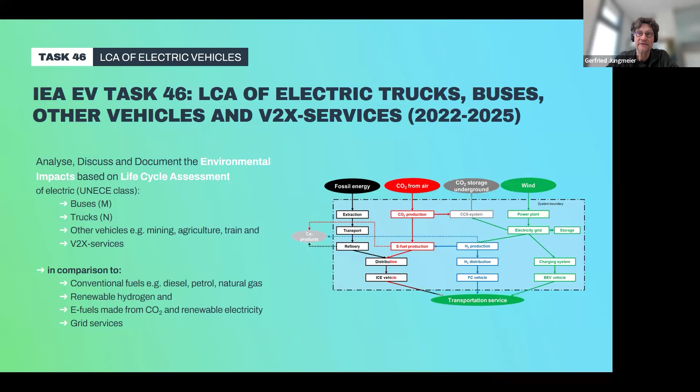Our view on these different systems is always based on life cycle assessment, where on one hand you have the transportation service we all need for our mobility needs, and on the other hand of the system boundary, our life cycle assessment always starts in nature by taking raw materials or energy from nature, which is then technically transformed via different process steps to the transportation service.

So far, we have an impressive list of 12 participants from different countries. I will not mention them all in detail, but at least we have 12 participating countries. We have also established a collaboration with another technology collaboration program on alternative motor fuels, because in the area of e-fuels, that was a very good synergy using also expertise from another collaboration program. And then we have 2 observers, so in total we are 14 participants contributing to this activity.

Coming back to the technology collaboration program, in total we are running several different tasks in many different areas. It's about electric freight vehicles, technology in that area, marine applications, electricity use in harbors and ships, but also critical raw materials needed for electrification of different transportation modes. We also deal with use phase, battery swapping, and economic modeling and systems that make electric systems economically useful.

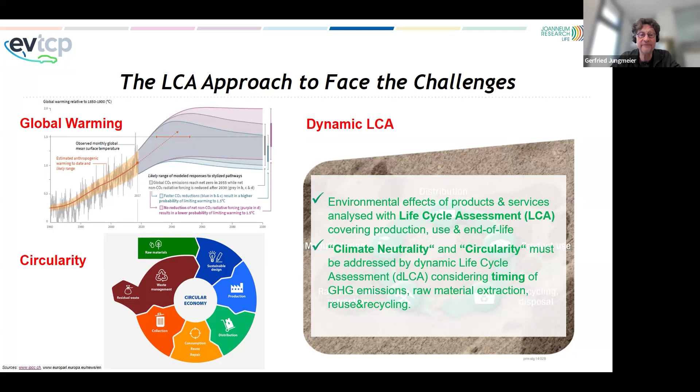To address climate neutrality and circularity, you have to apply a so-called dynamic life cycle assessment, a further development of LCA, because it's very important to consider the timing of greenhouse gas emissions, the timing of raw material extraction and use, and when reuse or recycling started over the overall life phase and lifetime of the vehicle.

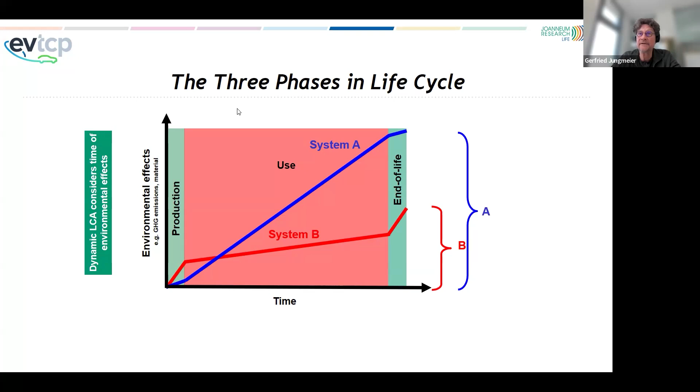Let me give an example. Looking at a vehicle's life cycle, you have the production phase, the use phase, and the end-of-life phase, with time running on the x-axis, while different environmental effects like greenhouse gases or materials are on the y-axis. Here you see two different systems with different accumulated emissions across production, use, and end-of-life phases. In LCA, if both systems provide the same service, at the end of the vehicle's lifetime, if system B is lower than A, you can clearly say that vehicle B has lower environmental impacts.

And there could also be a system C looking like this, maybe a higher emission on the very beginning, but during the operation phase, this line flattens, so you can still provide transportation service while not adding very much additional environmental burdens to the overall service. And in the end of life phase, of course, maybe we can also decrease the environmental effects. Yeah? And this is at least the system we are most interested.

One example is if you have an electric vehicle, if you buy it today and plug it in the Austrian electricity mix, you roughly get 75% renewable energy. But during the lifetime of this electric vehicle, the electricity generation system in Austria will change, because we have a national goal that in 2030 only renewable electricity will be available in our electricity grid. And that means as you get a different electricity during the lifetime of operating the electric vehicle, you at least have a development where you say you still can provide transportation service, but no additional greenhouse gas emissions.

And this we call towards climate neutrality, this flattening of the curve. And the second important thing of this system C is this decreasing effect in the end of life phase. This means if you're really able to recover some or even more, or even most of the material you put in the system, if you can recover this material and reuse it for any other further product, of course, this is also going in the right direction because it's towards circularity.

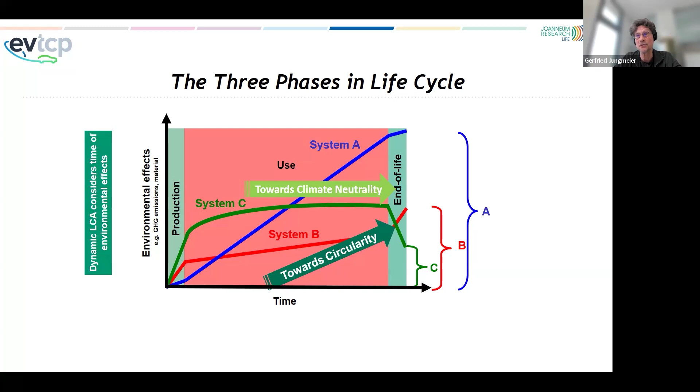So this is at least the system we are most interested in, to find systems that go towards climate neutrality and towards circularity. Finally, everybody's talking about climate neutral transportation system.

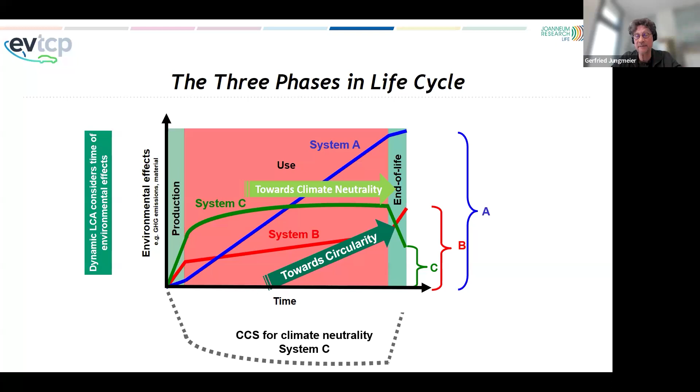And so far in our discussion, we say a climate neutral system is only possible if you combine it with a carbon capture and storage system using renewable electricity to capture CO2 from the atmosphere. At the same time, for example, here in the graph, the green system is emitting greenhouse gases. If at the same time, the carbon capture and storage absorbs this carbon or CO2 and stores it forever underground, this might be a principal system that is really climate neutral.

because you have no greenhouse gases in the overall lifetime. So when we talk about climate neutrality and circularity, of course, the most important thing is on the very beginning to define what is climate neutrality and what is circularity. And this definition you see here is really dedicated to be applied within life cycle assessment. And we say a system is climate neutral and circular if in the whole life cycle covering production, operation, and end of life phase, if you only use reuse components or secondary recycled material, and you only use renewable energy.

And while doing so, you also make no waste and no greenhouse gases. Yeah, so if you fulfill these requirements, no primary material, no waste, and no fossil energy, at least then you say this is really the ideal climate and circular transportation system, or which is valid, at least I think also for other products and services.

And using this definition, we have developed two indicators. We have an indicator measuring the circularity potential, which is the material circularity index, between 0 and 100, or between 0 and 1, where 0 means a linear system, where everything becomes waste, where in a circular system, everything is really in a closed cycle.

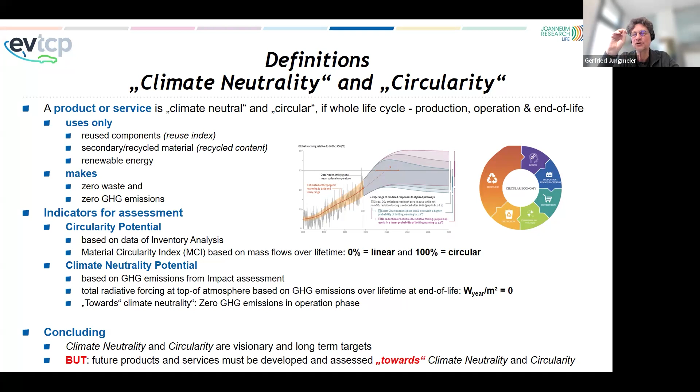And we really have to see if our products and services we are now developing, that at least they show that they have the potential to become climate neutral and circular, and at least that they go in the right direction, which means towards climate neutrality and towards circularity.

Why is it so important? When you have the greenhouse gas emissions, you see here in the graph that the greenhouse gas emission is something different than the climate neutrality potential.

So in a normal LCA, you would say all the systems have at least the same service and the same greenhouse gas emissions, so there is no difference. Therefore, it's important to really have the timing of these emissions over the lifetime, and secondly, to count the radiative forcing potential at the end of life of the overall system, because there you see how much these greenhouse gas emissions are heating up the planet.

We all know that if you emit greenhouse gases today, a part of these emissions is decreasing and disappearing, mainly in the ocean, over time. And the later you emit, the later this process starts. So this climate neutrality potential is a way to really measure and judge the timing of the greenhouse gas

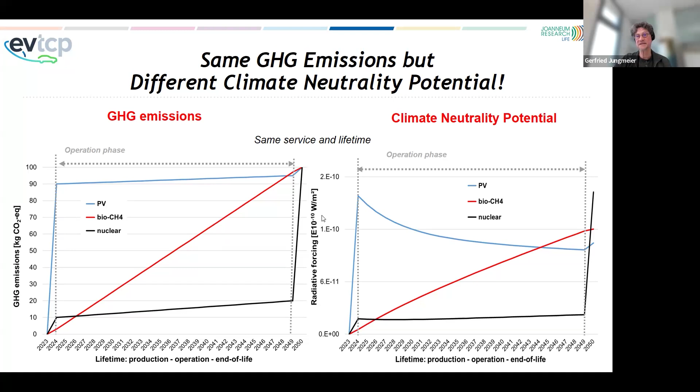And the second important thing is this circularity potential, where we used as a starting point the material circularity index, developed by the Ellen MacArthur Foundation, which includes a material factor and a utilization factor. And you can calculate this factor. The more you use renewable energy, the more you recycle, and the more you reuse materials, the higher this circularity factor is.

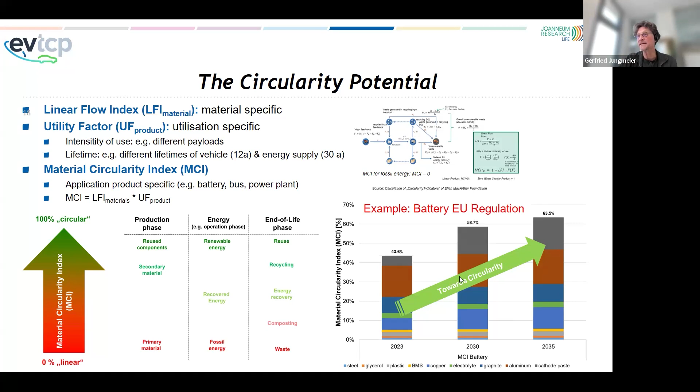We did a small application looking at the EU battery regulation, where they have binding targets for using recycled material and certain recycling efficiencies and collection rates. You see here the current material circularity of a battery today, in 2030, and in 2035. If these rules from the EU battery regulation are applied, the circularity really increases from roughly 40% to over 60% in the future.

And so in our case study, we analyzed many different trucks. We looked at small trucks, medium trucks, and big trucks. Today I will only focus on the small trucks, but if you're more interested, you can ask me. We have already published this paper at a conference, so the whole work is available.

Most relevant in this analysis, beside the different trucks, is that we use only renewable electricity, because only with renewable electricity do all these systems really gain the highest environmental benefits. Additionally, we say we need to build new electricity generation plants, so building the new electricity generation plant is part of this LCA. We're not only building the truck, we also have to build at the same time the facilities for additional renewable electricity, but also, in comparison, the facilities needed for hydrogen production and for e-fuel production.

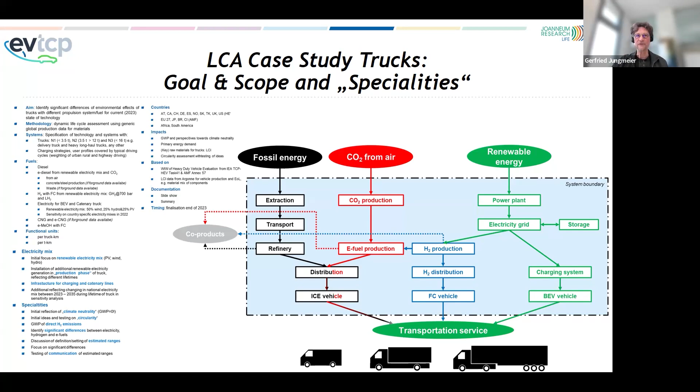Additionally, we have a big question in our LCA case study. There are so many environmental impact categories on a global, local, and regional level in conventional LCAs, but none of them really covers the climate neutrality potential and the circularity potential. So for us, it's very important to see if these are really new impact categories not covered by any of the already existing categories.

Here you see a final result, as most of you may have seen already before. You see the greenhouse gases and the primary energy demand for the different systems we compared: diesel, e-diesel, electricity, and hydrogen. You need as a minimum the primary energy and the greenhouse gas emissions, because you see the results on the energy side are quite different from the greenhouse gas emission side.

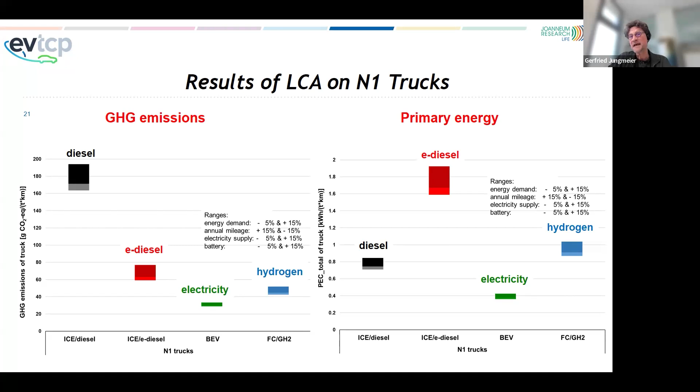So this is at least a conventional result. We are all used to it, but here you do not see or are not able to calculate the climate neutrality potential. Nevertheless, you still see which of these systems has the lowest greenhouse gas emission and which system has the highest energy efficiency.

So in our assessment in this dynamic LCA, we get at least the same results. You see how the emissions are accumulating over the lifetime. For example, the systems using renewable electricity, like hydrogen, e-diesel, and electricity, have more or less a flat line during the operation phase because they use renewable electricity, and this guides you towards climate neutrality. On the other hand, the diesel system has a steady increase in greenhouse gas emission due to the use of diesel.

But it's also very important to see that in the construction phase, at the very beginning, when you build the truck and especially all the infrastructure and the electricity generation, these systems have significantly higher greenhouse gas emissions than the diesel system.

But over time, these systems really have the potential to become climate neutral, to go in the right direction, which you can also see in the climate neutrality potential on the right-hand side, where you can compare the radiative forcing potential.

The decrease in the end-of-life phase is mainly due to the longer lifetime of the electricity generation system, which lasts at least 20-25 years, where the truck only lasts 10 or 12 years. So at the very end, the electricity system and the infrastructure can be reused for any other purpose. That's why in the LCA you have to allocate these positive effects to the considered system, and that's why in the end-of-life phase these effects are decreasing, giving you the final value at the end of life.

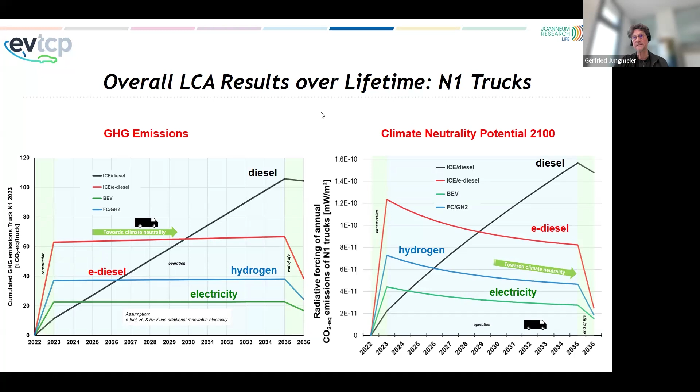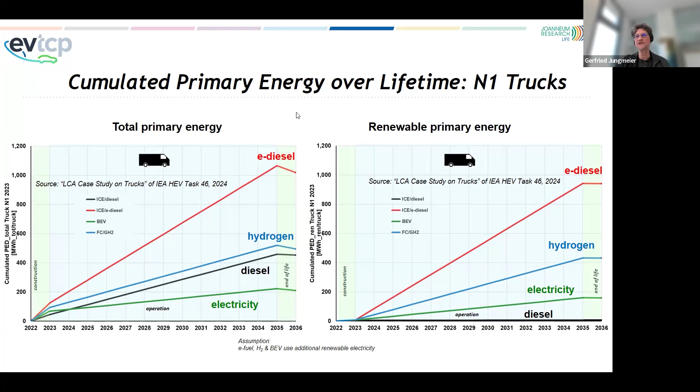You can do the same analysis if you look at the primary energy in total, on the left-hand side. More interesting is the share between renewable energy and fossil energy. You see here that the e-diesel system needs much more electricity to drive a kilometer compared to hydrogen, and you need significantly less energy when you drive with electricity directly. So using renewable electricity for truck service is much more efficient - you need much less energy for the same ton-kilometer in our consideration compared to hydrogen and compared to e-diesel.

Last but not least, I'll show you some results of our circularity potential, where we looked first at the different components, starting with the trucks. If you look only at the trucks, on the left-hand side, you see that the diesel truck has a higher circularity potential than the battery electric truck or the hydrogen truck. This is because of the fuel cell and the hydrogen tank, and because the battery has a lower circularity than, for example, the diesel engine and diesel tank.

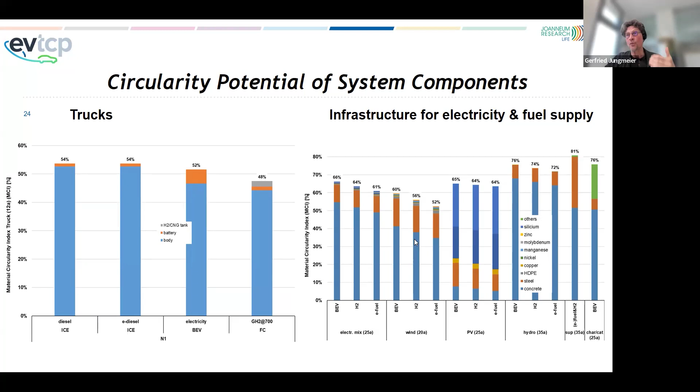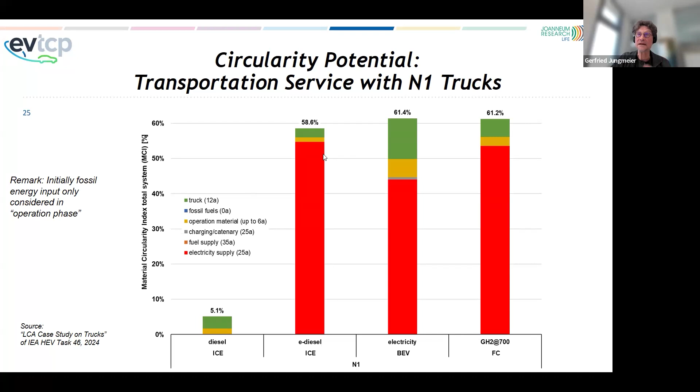On the other hand, on the right-hand side, you see the same analysis for the electricity supply, and also for the supply and production of hydrogen, e-fuel and diesel, which also have different circularity potentials. In the overall system, if you combine the circularity of all the components needed in the life cycle to provide a transportation service, based on the mass balance over time, you see that diesel has the lowest circularity potential due to the use of fossil diesel - so much of the mass used is diesel, which is not circular. That's why diesel has such low circularity, whereas the other systems using renewable electricity have a similar circularity, in the range of 60%.

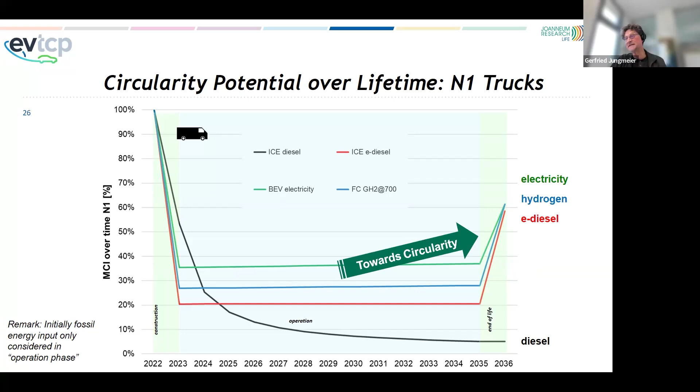And on the very end, due to the reuse of mainly the electricity system, but also the charging system and the hydrogen production system and so on, you get an increase on the end of life phase, because you are able to reuse main parts of the system for any other system after 2036. So this means this system is going towards circularity, but with 60%, it's still far away from being really 100% circular.

The overall result just summarizes what you have seen so far, and this also shows you that the electricity battery electric system in all of the components has the best environmental performance, and the diesel has the worst performance, except for the primary energy total demand, which is higher for the e-diesel and the hydrogen.

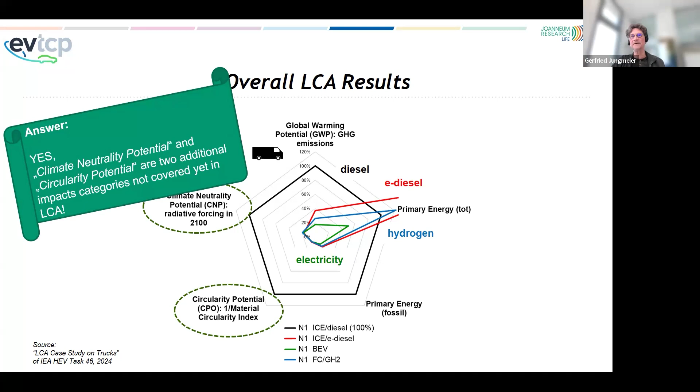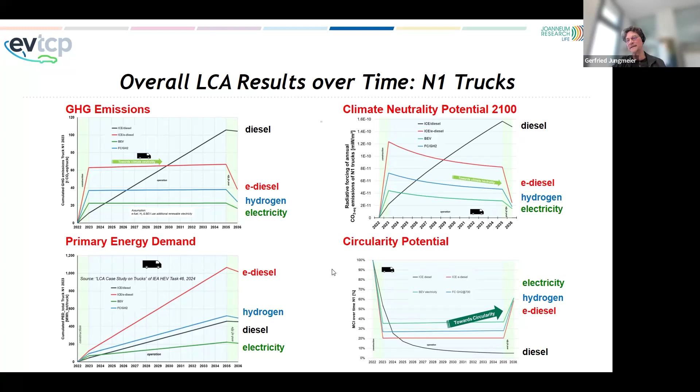And yes, we can answer the question at the very end. We think that climate neutrality potential and circularity potential are really two additional impact categories not yet covered in life cycle assessment. And that's what we wish for the future, that we really all apply a dynamic life cycle assessment by really timing greenhouse gas emissions, material extraction, material reuse over time, so that we're really able to judge the overall system and identify which systems in the very end have the highest environmental benefits.

I would not repeat my conclusions again. I've done that at the very beginning, but this was at least my best explanation now to explain to you how we come to these conclusions in the detailed analysis. And after the next presentations, I'm looking forward to getting some questions in the chat.

Thanks, Gerfried. Yeah, thanks for having me. I'm Robin Smit, Director at TER and an adjunct professor at the University of Technology, Sydney in Australia.

Next slide, please, Gerfried. So basically the previous presenters already talked a lot about it, but very quickly, LCA is a very powerful tool, as I'm sure everybody is aware now. It's basically a systematic evaluation of all the aspects of a vehicle's life and its associated impacts, and those impacts can vary to a great extent, and there's different ways of looking at an environmental impact, as Gerfried already discussed.

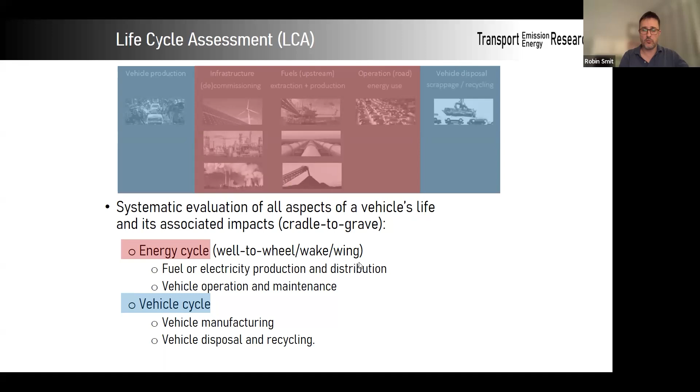But I like to split it into the energy cycle and the vehicle cycle. The energy cycle is also referred to as the well-to-wheel analysis, which I will talk a bit more about in this presentation, which includes the fuel, electricity production and distribution, and also importantly the on-road driving and maintenance. The vehicle cycle is basically anything related to the production and the disposal of the vehicle.

I think it's important in any LCA to consider four important elements to ensure that we get reliable and robust results. This is from our own experience. First of all, it needs to be country specific as much as possible. There's a range of key factors that can vary substantially between countries and even regions, and they need to be considered wherever possible. Also, they need to be mode specific, and I will talk a bit more about that in this presentation. So when I talk about different transport modes, I'm not only looking at road transport, but also rail, air, and sea transport, and they all require different methods in terms of their impact estimation.

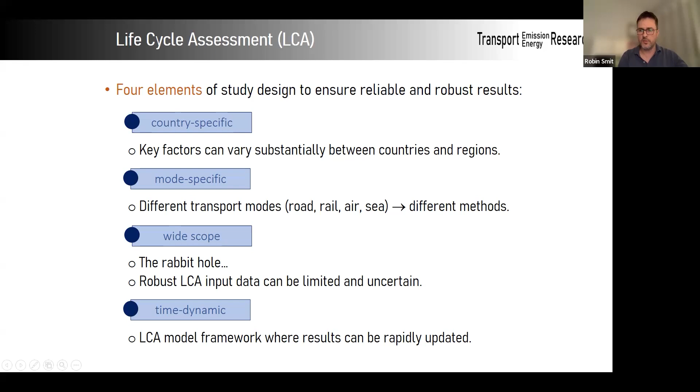By definition, LCA has a wide scope and has the risk of disappearing into a rabbit hole, because you can go to the nth degree in quantifying and analyzing different aspects. So that's one of the main challenges of LCA. And on top of that, robust LCA input data can be limited and uncertain and needs to be dealt with as well. And the last point is time dynamic—not the same as the dynamic that Gerfried talked about. What I mean here is that things are changing very rapidly in the transport space and the renewable energy space, so things can become quite quickly outdated. So you really need a system that can quickly update the LCA results.

Next slide, please. So I'm just going to quickly talk about two studies that we did, one for passenger vehicles and one for trucks. They're all open access papers, so if you're interested in the details, they can be accessed. I just want to point out at the front that our focus is really on the greenhouse gas emissions, and as Gerfried pointed out, that is just one of the aspects that you can look at in LCA. But in the transport sector, at least, it's possibly the main driver of the changes that we're undergoing at the moment, so greenhouse gas emissions by itself are really important. Our focus for the functional unit is grams per kilometer for passenger and freight, but also grams per ton kilometer for freight transport.

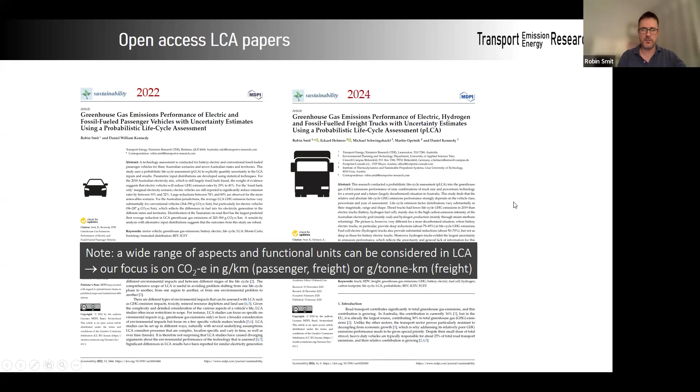So getting back to the modeling approach that we typically use. The first step is to include all the key variables in a mathematical formulation of the LCA model. The second important point, referring back to the previous elements I talked about, is to...

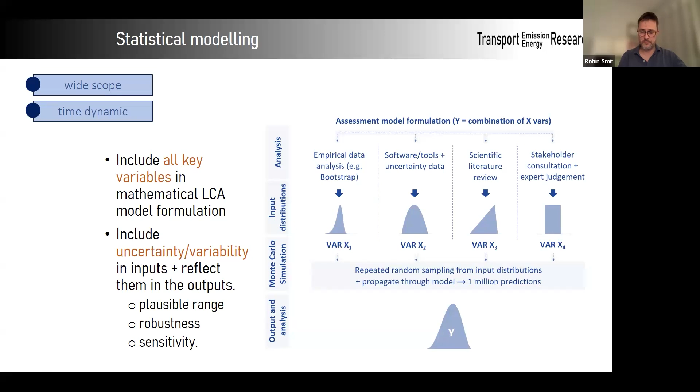Just a few examples of key variables that we normally include in LCA models. For example, lifetime mileage and service hours are linked, but they are obviously very important if the functional unit is kilometers or ton kilometers. The emission intensities of the different types of fuels and energy is quite relevant. Vehicle specifications are of course quite relevant as well, and need to be used to achieve a good classification of the transport units you're looking at.

In particular, the variability in battery, the fuel cell, and the tare mass of vehicles is quite relevant for LCAs in our experience. The durability of batteries and fuel cell systems is a critical factor, and we explicitly model that with a system replacement factor. There's a lot to be said about that particular aspect of the LCA, and it's also very time dynamic.

The payload of the vehicle, and the various losses in the systems like battery charging, leakage of hydrogen, grid losses, etc., need to be accounted for. An important one is real world fuel and electricity consumption per kilometer. And of course, this real world energy use is a function of other variables like the tare mass of the vehicle, the year of assessment, etc.

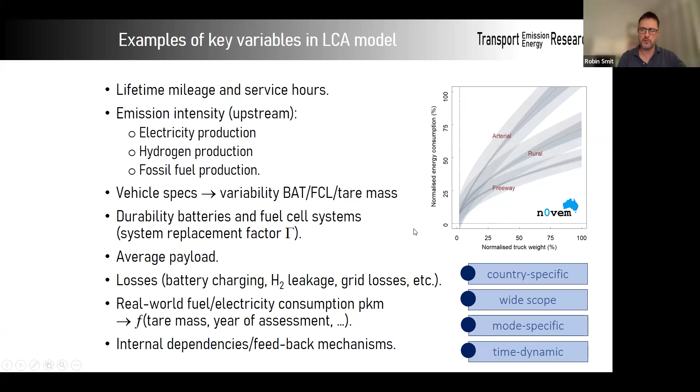That brings me to the last point, which is the internal dependencies and feedback mechanisms that need to be explicitly modeled. On the chart at the top, you can see an example where the normalized energy consumption is plotted against the normalized truck mass. You can see that this is typically a non-linear relationship, but not only a function of the truck mass, but also of the driving conditions, for example arterial driving versus freeway driving. So those things need to be accounted for.

Sometimes simulation can help. In this case, we're interested, for example, to get insight into the distribution of the battery mass for heavy commercial vehicles in 2019, battery electric trucks. We didn't have a lot of information for it, so instead we went back to first principles and formulated plausible distributions for battery capacity and battery density, and then simulated that to create the input distribution for battery mass, which is then combined in the LCA model later on.

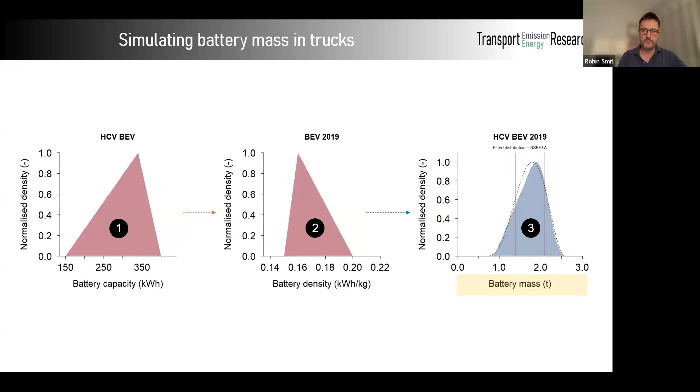One of the things we're doing as well is truncating those distributions, because we don't want to have unrealistic input values. But like I mentioned before, the use of empirical data is preferred. So, for example, for diesel trucks, we actually have data on the vehicle weights, which we have then processed and statistically analyzed to create useful parametric distributions.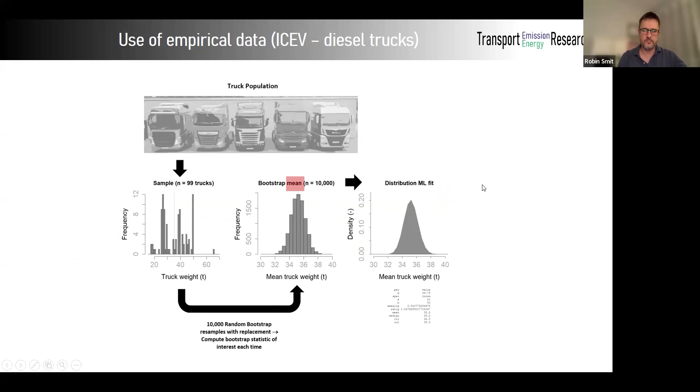So getting to the results now. I won't go into all the details here, but just a very quick look through the results. Our results were specifically done for Australia.

Basically what we found, in line with studies around the world, is that battery electric vehicles for passengers reduce life cycle greenhouse gas emission rates, normalized in CO2 equivalents per kilometer. Specifically, the Australian electricity mix in 2018 was mainly fossil fueled still, 80%. We still found a reduction of 30 to 40%, mainly due to the superior energy efficiency of the battery electric vehicle that Gurpreet already mentioned. But in a more renewable electricity scenario, where we only assume 10% residual fossil fuels in the electricity mix, you get deep reductions of 75 to 80%.

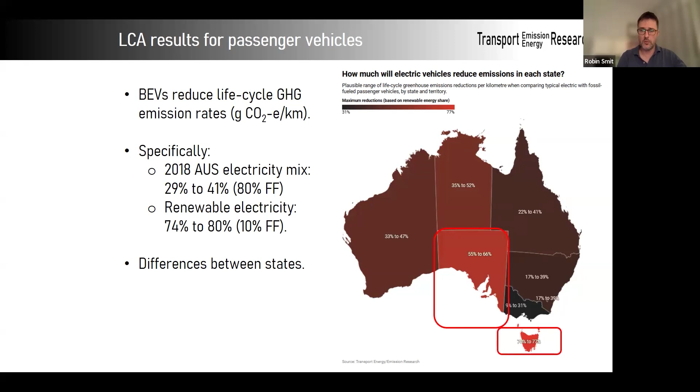And that's not a future scenario, really. As you can see, I live in Tasmania. We already have a 70 to 77% reduction because it's mainly hydropower and wind energy here. So it also highlights the difference between the states, which we also see in Europe and the United States, where there's similar differences in the different regions.

The other interesting thing, of course, is to look at the relevance of the different aspects of the LCA. We find time and time again that the operational side, the on-road driving, is most important. About 70% of the total life cycle emissions is accounted for by on-road driving for both fossil fuel cars, so petrol and diesel, as well as battery electric cars. The vehicle production side is higher for electric vehicles, as also observed around the world. But that's compensated for by the upstream emissions, which are lower for electric vehicles than for diesel and petrol cars.

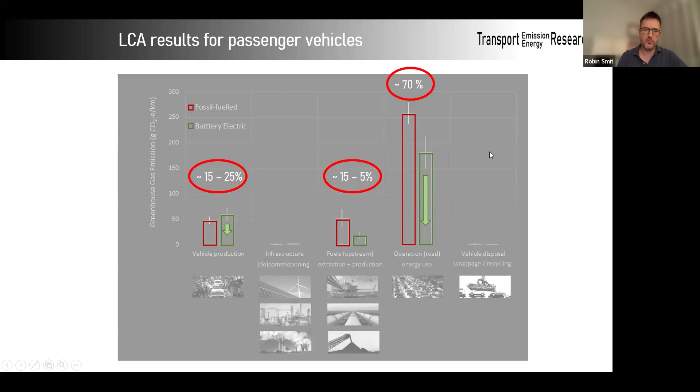So for trucks, this is a more recent study. We collaborated with our European colleagues here. We had many interesting discussions because it's a bit more challenging to quantify trucks. We looked at three different truck classes defined in terms of gross vehicle mass: less than 12, 12 to 25, and more than 25 tons. I think that last category is particularly interesting, as we'll see, because we use a lot of B-doubles, double two-trailer truck combinations or more, in Australia, and that has impacts on the LCA results, which I will discuss soon.

For 2019, we found that diesel and battery electric vehicles for the smaller categories are more or less similar, but for the large trucks, actually diesel had a better emissions performance, and this is of course due to the high carbon intensity of the electricity grid in Australia at the time.

This is now changing very quickly. So of course we looked at the decarbonized situation, where the battery electric trucks perform the best, as you can see in the shifting distributions with the green circles. Battery electric vehicle trucks again provide deep reductions of 75 to 85%. Fuel cell vehicle trucks have a significant reduction of 50 to 70%, but I'd like to point out that battery electric vehicles provide an additional 45 to 50% reduction compared to hydrogen trucks. That's quite significant at a time when we really need to rapidly reduce greenhouse gas emissions.

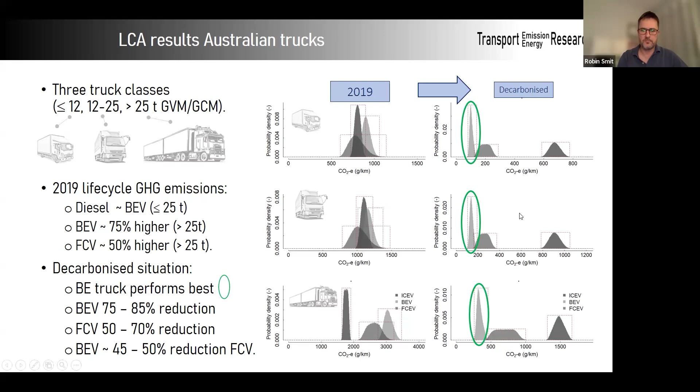So just in summary, you can see the distributions for trucks in 2050 on the right side, again split between the different aspects of the life cycle assessment. The overall message again is that the energy cycle dominates the total life cycle emissions. Of that, the operational emissions, the on-road driving, dominates the life cycle emissions, varying between 50 and 85%. The vehicle cycle is not that relevant for diesel trucks, but it's more relevant for electric vehicles. Disposal and recycling seems to have a minor impact in our calculations.

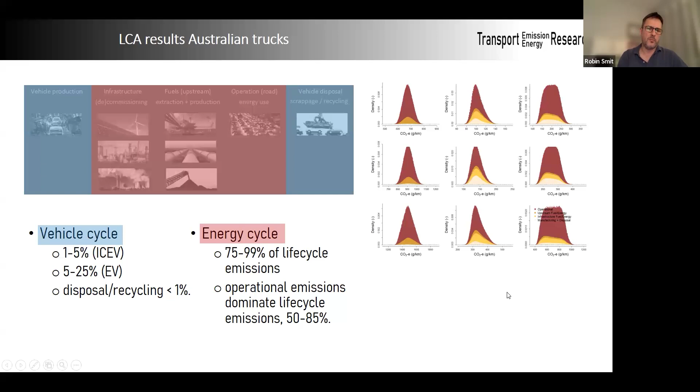We also compared with international studies, and we compared it with the IPCC 2022 review. In general, our results, which you can see at the top, compare quite well with the range of reported studies by the IPCC. But there's two things that stand out. The first is the low emission intensity of our heavy articulated trucks in Australia.

What I mentioned before, we have two-trailer or more trailer combinations for the trucks, and that really improves the emission performance of the heavy trucks when you look at diesel engines. So that is a significant difference compared with the international studies.

The other thing that's quite different is the wide range we've estimated for hydrogen trucks. I think that's specifically because we simulated the uncertainty on many aspects of these types of trucks. We didn't hide them, we just simulated them. As a consequence, they can produce the highest emission intensity of all the trucks considered, and we didn't see that in the IPCC studies that were reviewed. That might be an element of the way we explicitly model the variability and uncertainty in the LCA performance statistics.

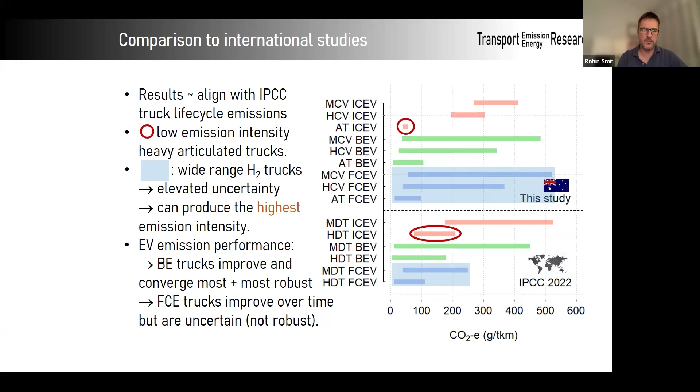In essence, we found that the battery electric trucks improve and converge over time in the most strong manner, and also the most robust. They have the most narrow distribution at the end, which means that the results are most likely to happen. The fuel cell electric trucks improve over time, but are quite uncertain and not robust, as you can see from the plot.

So what about the other transport modes? I'll very quickly touch on those. We did a very quick literature scan, and it appears at first sight that the majority of LCA studies really focus on road transport. But of course, there are other sectors that are relevant and important as well.

Actually, the other transport modes, like air transport, shipping, or rail, the energy cycle may dominate even more. This is because those vehicles have very long lifetimes, relatively speaking. They typically have long operational hours and travel large distances. And the other thing is that different functional units could be of interest, for example total emissions, which I will touch on soon.

Just to recap, the LCA is the best method because you basically look at the energy cycle as well as the vehicle cycle, whereas the well-to-wheel, wing, and wake only look at the energy cycle. But the good news is that typically that captures most of the bulk of the life cycle emissions, so it's a good estimation if there's no better information available.

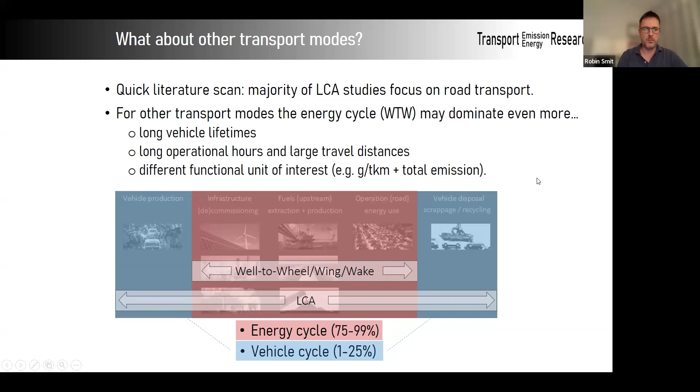So we did a study last year where we did a well-to-wheel, wake, wing analysis for intercapital transport in Australia. Again, this is open access, so if you're interested, please have a look.

I won't have a lot of time to go into the details, but basically the first step is to define the transport units that are of interest. For passenger vehicles, we looked at the whole fleet mix, including the different types of vehicles and the powertrain technology mixes that occur now and in the future. We looked at high-speed rail, which is not available in Australia yet, but definitely of interest. For air, we looked at the typical domestic planes, the narrow-body single-aisle aircraft like the A320 and the Boeing 737.

For road, we looked at the B-double that I mentioned before. We looked at freight trains, whether diesel or electric. We looked at typical ships used in Australian waters, the bulk carriers and container ships of specific size. And again, we looked at the same planes, which are also used for freight.

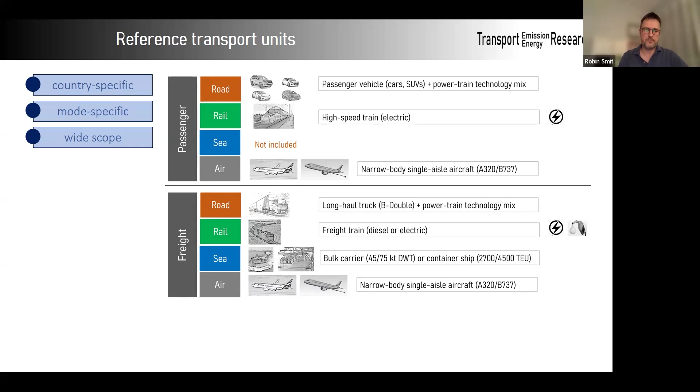So we looked at a specific case study here, called the Inland Rail Project, and we compared the four transport modes. We looked at passenger as well as freight for 2019, 2030, and 2050, and we looked at the energy cycle emissions here.

The first thing that becomes obvious here is that when you compare different transport modes, the distance of travel can vary significantly. So sea transport has 60% more travel distance than air transport. And of course, this is important for emissions and needs to be considered in the LCA or the well-to-wheel study.

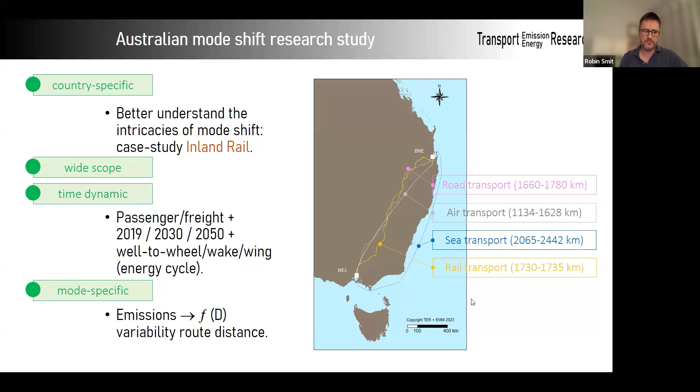One of the other things that is important is that, like I mentioned before, the different transport modes have different models and methods to estimate emissions, but all the methods basically include vehicle mass as a key variable in the energy, fuel consumption, or emission modeling.

You can break vehicle mass down into three components: the empty mass of the vehicle, the payload, and the fuel. As you can see in this table on the right, there could be some significant variation between the different transport modes. In particular, for aircraft, the fuel mass makes up quite a large proportion of the vehicle mass, varying between 15 to 30%. That is quite significant because during the flight, a lot of this fuel is being used, so the impact on the energy use and emissions needs to be explicitly modeled because of that specific characteristic of air transport.

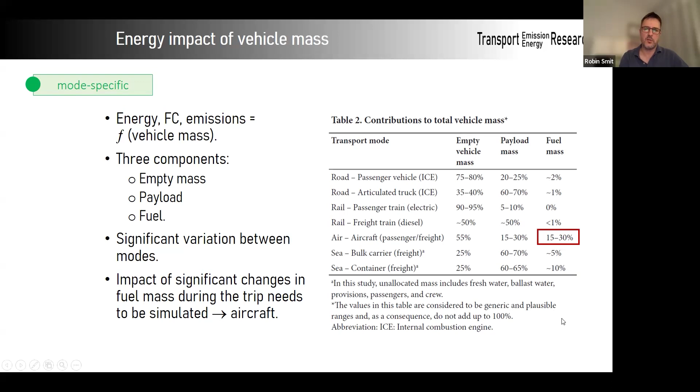We use different models for the different transport modes.

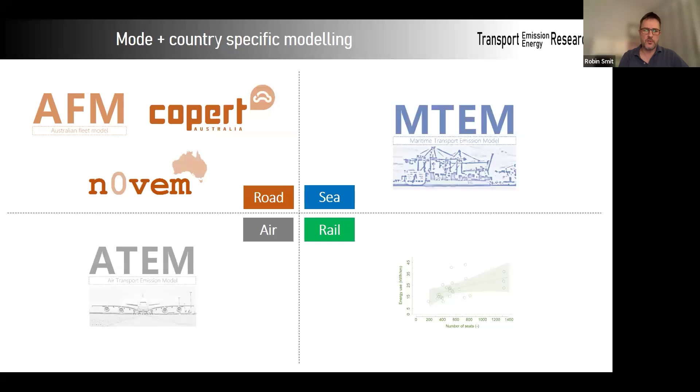Just to point out a few things, when you start looking at other transport modes like shipping and air travel, they basically take place in moving media.

So you need to take into account things like ocean currents, wind fields, and those sort of things. Another specific aspect for air transport is the non-CO2 climate effects like contrails, aircraft-induced clouds, and ozone formation, which can have quite a significant additional impact on climate change. So we explicitly included those in the modeling result as well, including their uncertainty again. What we've seen happening in the past is that studies excluded them because they're highly uncertain, but in our case, we actually explicitly model uncertainty so we can include them that way.

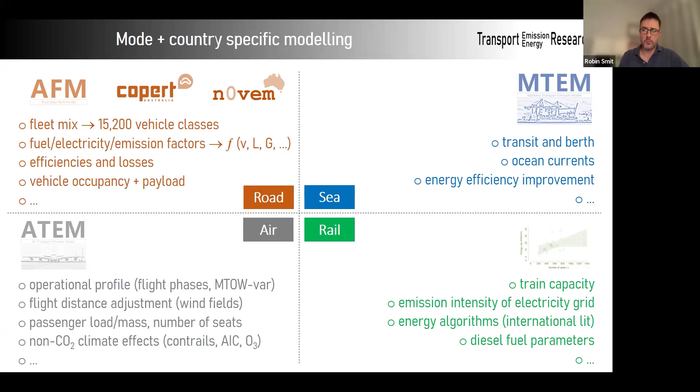Operational conditions, of course, are modeled for all those transport modes, and things like vehicle occupancy and payloads become quite important and can be quite different across transport modes as well.

So these are the results, the distributions for freight. And you can see that aircraft is at the bottom, on a different scale. It's about 100 times higher than the other transport modes. So the emissions performance for aircraft is significantly higher than the other transport modes that we looked at.

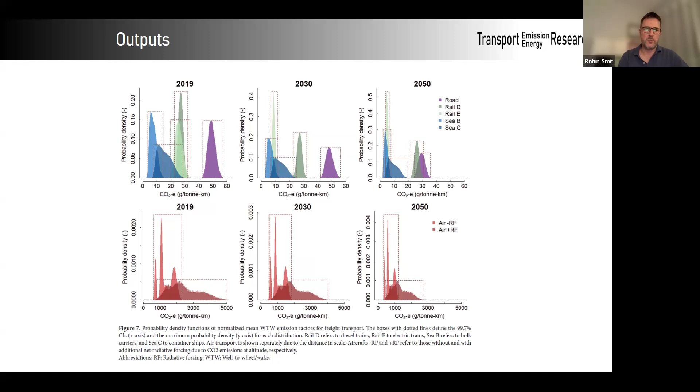Sort of an easier way to present this is as a time series. So you can see passenger transport on the left and freight transport on the right.

Starting on the left, for both transport modes, we see that electric rail has the deepest and most robust greenhouse gas emission reductions of all the transport modes.

Road transport is stable, increasing even a little bit for passengers because of the increased size and weight of the on-road vehicles being sold in Australia, and I think that's a similar trend all over the world at the moment. Air transport, obviously, for passengers is quite uncertain and higher as well.

But when you look at freight transport, sea transport is actually also quite low, although also quite uncertain. I think the main message here is the different trajectories taken by the different transport modes. Electric rail is decarbonizing very quickly in line with the decarbonisation of the electricity grids, and therefore the cumulative emissions will be significantly lower than transport modes that take longer to decarbonize.

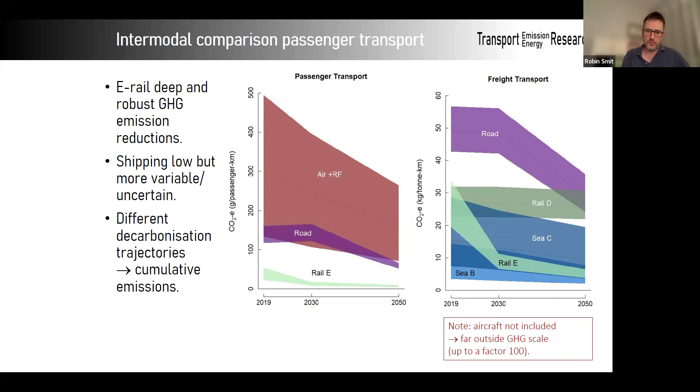I did not include the aircraft emissions on the freight transport because of the different scale, as I showed in the previous slides.

So just going to the conclusions now. The LCA is the best method, and it's versatile and very powerful, as Gerfried and previous presenters already discussed. But well-to-wheel will generally capture the bulk of the total life cycle emissions, so it's a reasonably good first estimate, I would say.

But for any of those studies, it's critical to reflect country-specific data and information, to assess the uncertainty and variability in the results, and also to have a system in place that enables rapid and cost-effective updates.

In our studies, we've basically seen that electrification of the on-road fleet is the most robust way to reduce greenhouse gas emissions from road transport.

We also saw that the different life cycle aspects have different contributions, and the difference is most pronounced for diesel versus electric trucks. Battery electric vehicles are expected to achieve the deepest, most reliable, and robust reductions in life cycle greenhouse gas emissions, and therefore carry the lowest policy risk of not delivering anticipated emissions performance, which is, I think, very important at this point in time.

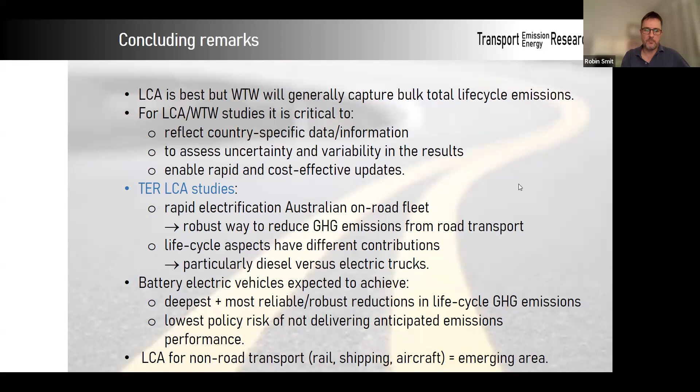And then last point basically is the non-road transport LCAs, I think, is an emerging area, and we're quite interested to keep an eye on that and keep our work in this area as well. Thank you very much.